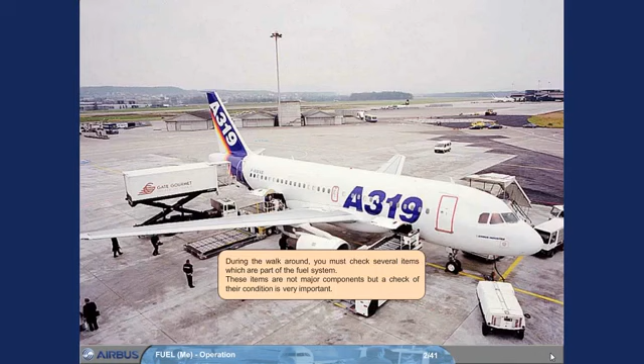During the walk-around, you must check several items which are part of the fuel system. These items are not major components, but a check of their condition is very important.

Fuel can be measured manually by the magnetic fuel level indicators, installed as follows: 1 under the center fuselage, 4 under each wing inner tank, and 1 under each wing outer tank. We are looking at a magnetic fuel level indicator under the right wing inner tank. It should be flush with the aircraft surface.

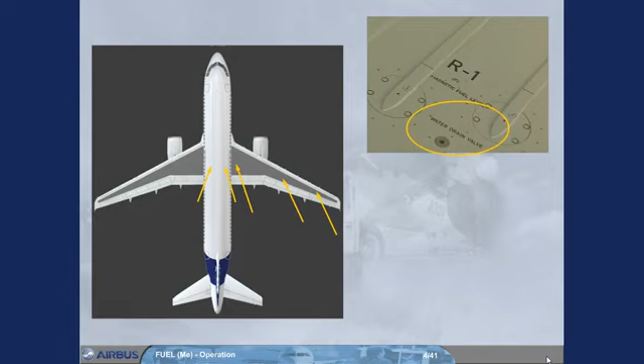Water drain valves are installed as follows: 2 under the center fuselage, 1 under each wing inner tank, 1 under each wing outer tank, and 1 under each wing surge tank. We are looking at the water drain valve in the right inner tank. You should check that there is no water leaking from the valve. If there is a leak, call maintenance.

A surge tank is connected to the outer tank in each wingtip. These small tanks protect the system against overpressure and thermal expansion. You cannot monitor or control surge tanks from the cockpit. The surge tank inlet should be clear of any blockage.

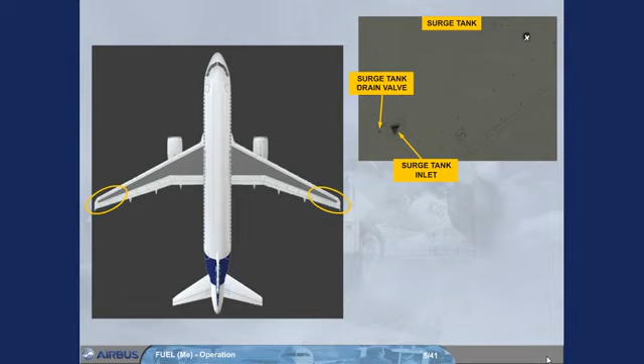The fuel ventilation overpressure disc should be intact. Note: the disc is intact when a white painted cross is in view.

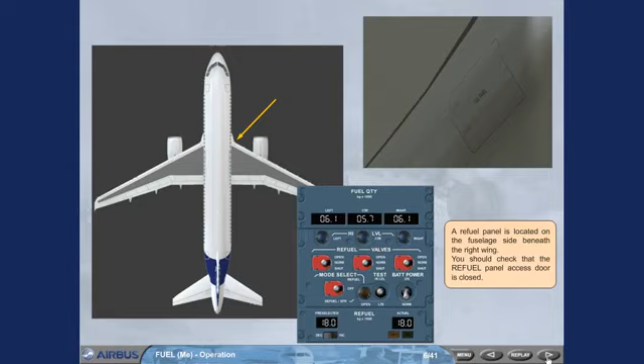A refuel panel is located on the fuselage side beneath the right wing. You should check that the refuel panel access door is closed. A single refueling point is installed under the right wing. You should check that the refuel coupling door is closed. Note: another refueling point can be installed under the left wing as an option.

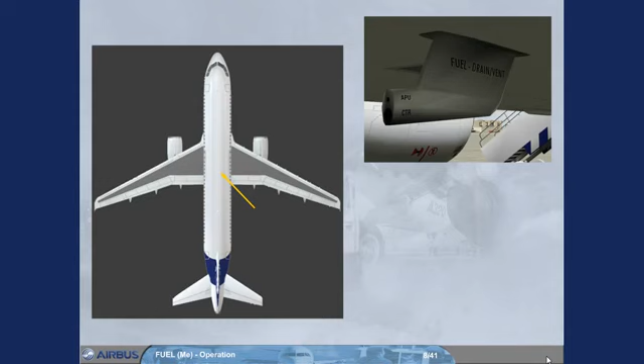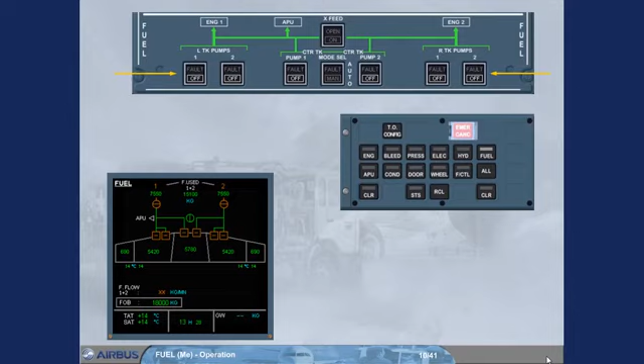We will now discuss items related to the fuel system that you will encounter during cockpit preparation. To better illustrate what occurs, we will select the ECAM fuel page for you. With the pumps in the off position, the ECAM shows the pumps cross-line amber. During cockpit preparation, all white lights in the cockpit must be extinguished.

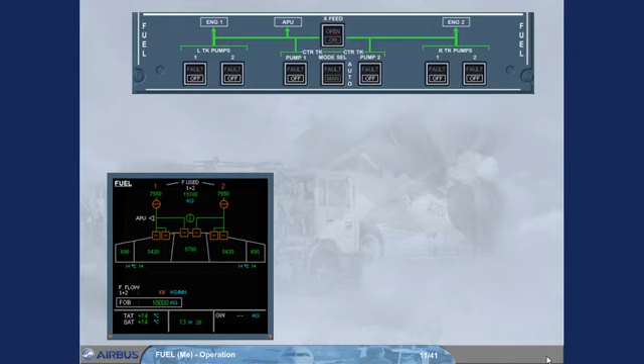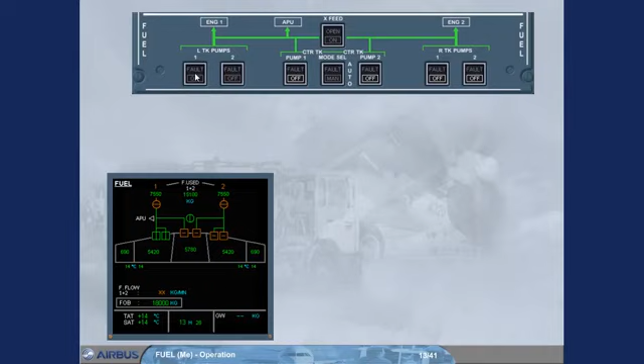Switch on left tank pump 1 and observe the ECAM indications. Left tank pump 1 on the ECAM fuel page is in line green, indicating that the pump is running. We have pressed the left tank pump 2 push button switch for you. Left tank pump 2 is now also running. All the pumps are now running.

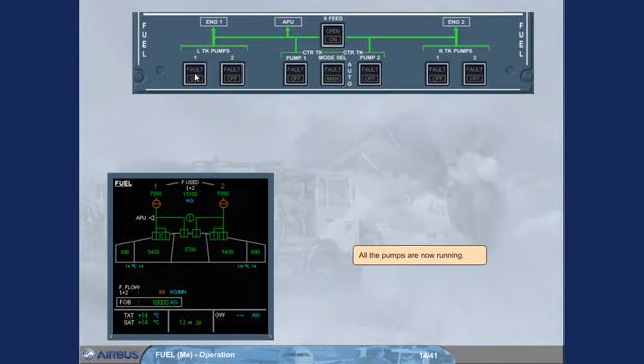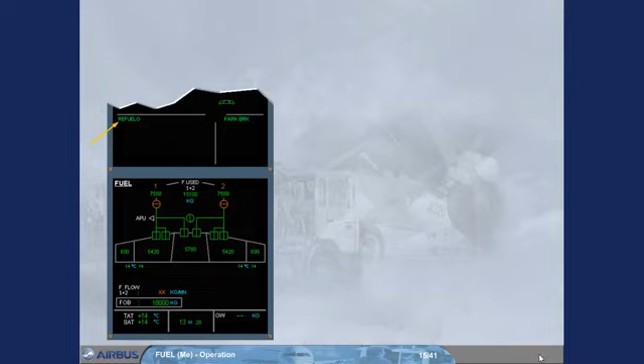Before you continue, you observe a message on the engine warning display. The message 'Refueling' indicates that the refuel control panel door is open. A few minutes later, you observe that the refueling message on the engine warning display has disappeared, indicating that refueling is complete and the refueling control panel door is closed.

Now, let's continue the pre-flight by inserting the fuel weight in the MCDU. We have typed the fuel weight in the scratch pad for you. Note: you can insert the fuel weight in the MCDU even if the refueling is in progress. The typed fuel weight can now be inserted in the MCDU by pressing the line select key to the right.

Then, you have to check that the estimated data — the trip fuel, the route reserve fuel, the alternate fuel, the final fuel, the minimum destination fuel on board, the extra fuel, the takeoff weight and the landing weight — correspond to the data on your computerized flight plan. Note: the minimum fuel quantity for takeoff is 1,500 kilos.

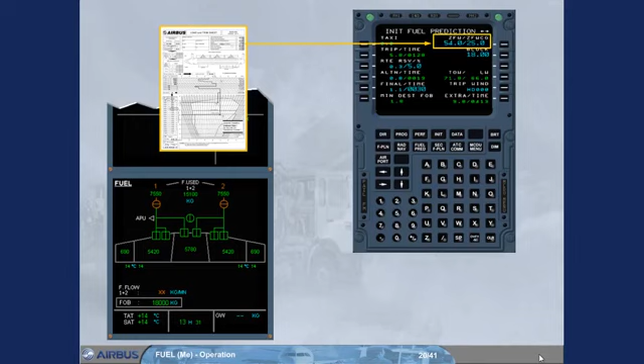Then, you have to check that the entered data correspond to the data from the loading trim sheet. For that, compare the zero fuel weight and CG zero fuel weight with the previously entered data and adjust if necessary. Also verify the fuel distribution in the different tanks.

It is now time to start the APU. Before starting it, notice that the APU triangle is white. This is to indicate that the APU valve is closed.

We have started the APU. On the ECAM fuel page, the triangle is now green and linked to the left-hand circuit. The APU valve is open and the APU is running. Also, as the center tank pumps are running, the left center tank pump feeds the APU fuel line.

The items related to the fuel system during cockpit preparation have all been seen. We will now discuss items related to the fuel system that you will encounter during engine start.

The indications and starting procedures are the same for both engines. In our example, we will start engine 2 first.

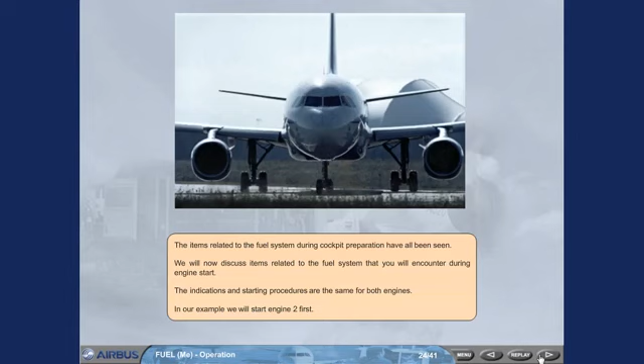Before we start the engine, observe the following. The engine LP valves are cross-lined amber to indicate closure. The fuel used quantities remain from the previous flight. Engine identification numbers are amber, because the engines are not running. The optional fuel flow 1+2 indicates amber crosses.

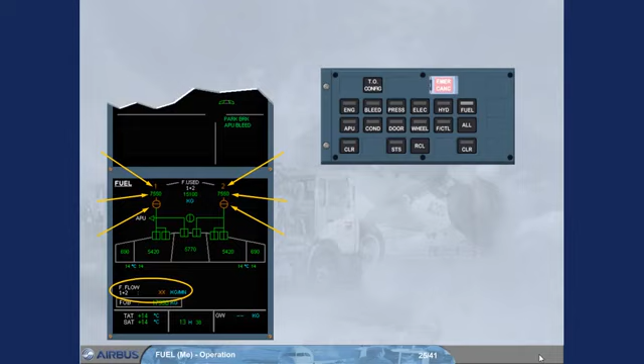Engine 2 is starting. Observe. The low pressure valve is in line green. The fuel used indication automatically resets to 0. The fuel flow starts. The engine identification number 2 changes to white. The gross weight has now appeared.

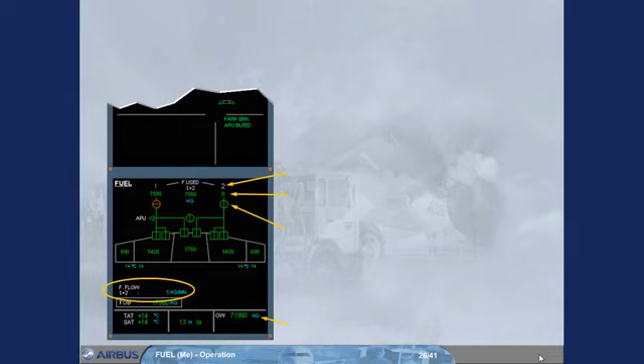Engine 1 is starting. Observe. The low pressure valve is in line green. The fuel used indication automatically resets to 0. The engine identification number 1 changes to white.

The message "Center tank feeding" has appeared on the engine warning display. This indicates that the center tank pumps are feeding the engines. Note, as the inner tank pumps have a sequence valve, the center tank pumps, when also running, deliver fuel preferentially, as long as slats are retracted. The center tank pumps automatically stop at slats extension. Then, it is time to stop the APU, if it is not required during taxi and takeoff.

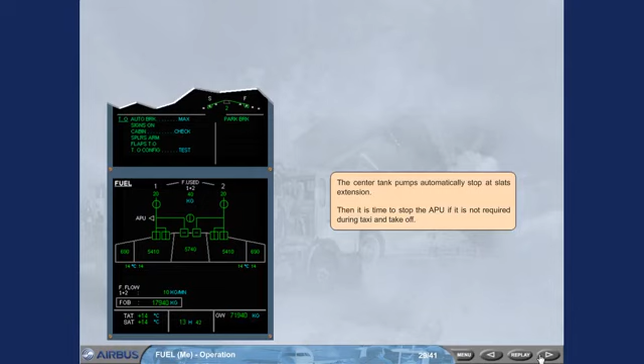We will now discuss items related to the fuel system that you will encounter during normal climb, cruise, and descent.

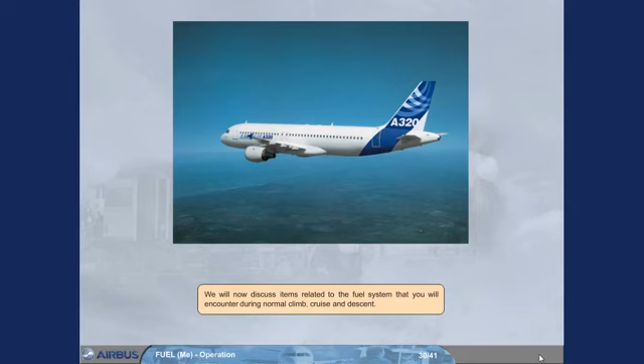You are in climb. The slats are now retracted. The center tank feeding message reappears, indicating that the center tank pumps are now feeding the engines. Note, the center tank must be emptied first.

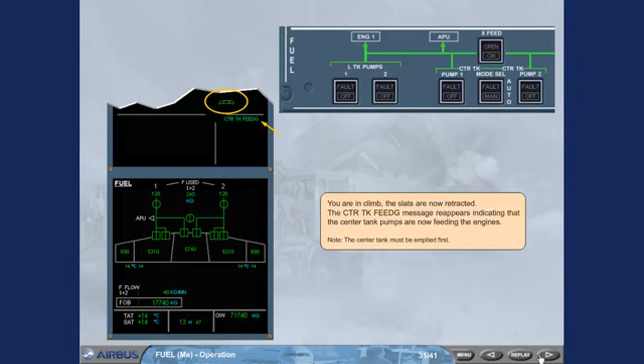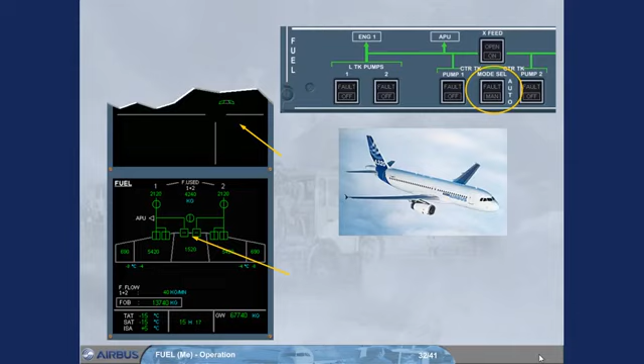You are now in cruise. Notice the center tank feeding message has again disappeared, indicating that the center tank pumps have stopped. However, the center tank is not empty, and another automatic function has occurred. To explain why, we must look at the IDG cooling fuel recirculation system.

Some of the fuel supplied to each engine is used to cool the oil system of the integrated drive generator, IDG, then returns to the related outer tank. If the outer tank is already full, it overflows to the related inner tank. When the inner tank reaches the high level, the related center tank pump is automatically stopped. So the engine is fed by the inner tank until it consumes 500 kilograms, and so on.

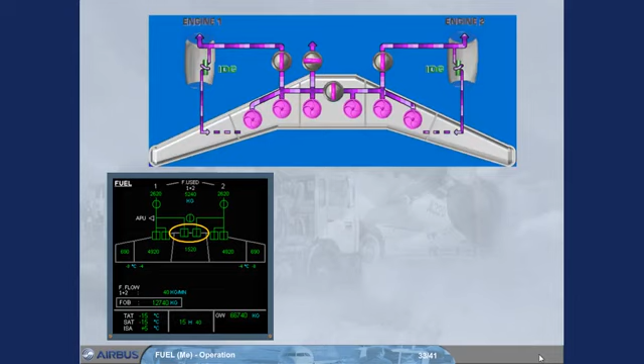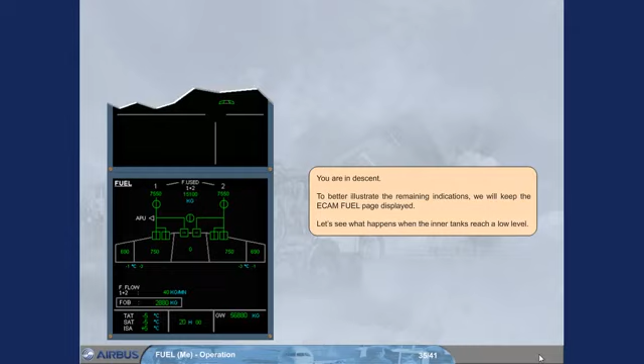Then, 5 minutes after the center tank has been emptied, the center tank pumps are automatically stopped. You are in descent. To better illustrate the remaining indications, we will keep the ECAM fuel page displayed. Let's see what happens when the inner tanks reach a low level.

When either inner tank reaches a low level limit, the transfer valves on both sides simultaneously open, enabling the transfer of fuel from the outer to the inner tanks. When at least one transfer valve is open, the message "outer tank fuel transferred" is displayed on the engine warning display.

As you can see, the fuel is transferring until the outer tanks become empty. Note, when the outer tank is empty, the related fuel tank temperature is not displayed.

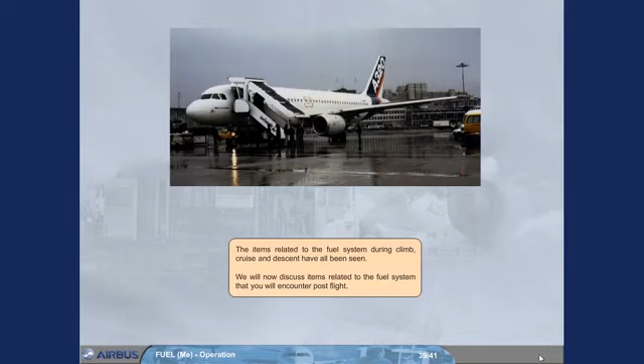The items related to the fuel system during climb, cruise, and descent have all been seen. We will now discuss items related to the fuel system that you will encounter post-flight.

The APU has been started, and after engines shut down, the fuel pumps must be switched off. Observe the transfer valves remain open. They will be automatically closed during the next refueling operation.